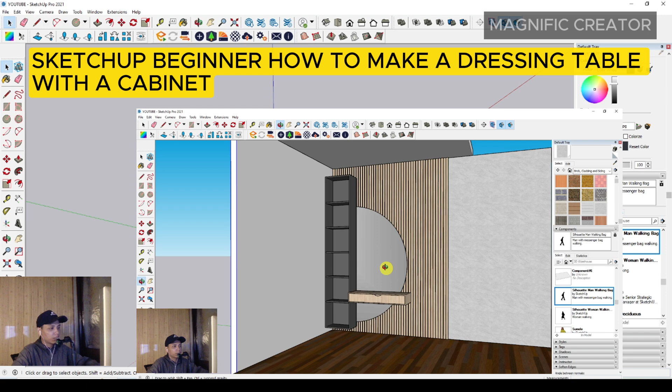Okay, this video I would like to share with all of you about how to make a dressing table with a cabinet. First of all, you have to make the floor and the wall existing. You can use a rectangle and then push it up with any size you want. Then you have to make it a group.

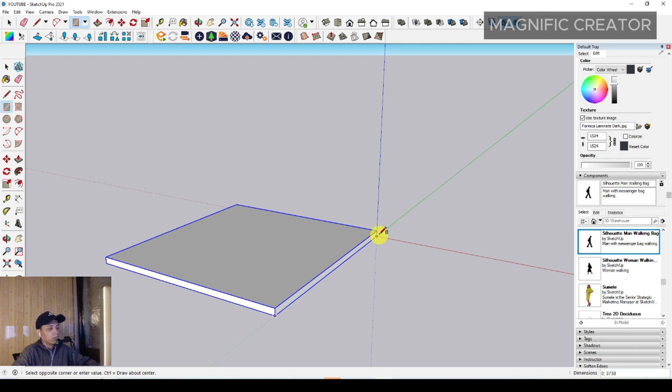After that you can use a rectangle to make a wall like this, and then push it to the back, and push it up until 3000 millimeters, for example. Then you have to make it a group.

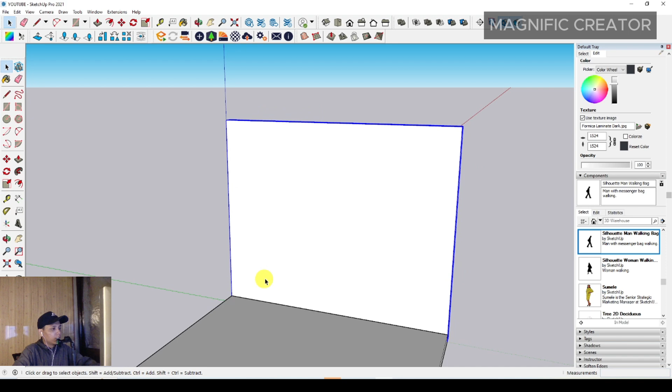After that you can make the elevation of the dressing table with the tape measure tool, and then set the value to around 750 millimeters. After that you can set the height of the cabinet around, maybe 500 millimeters.

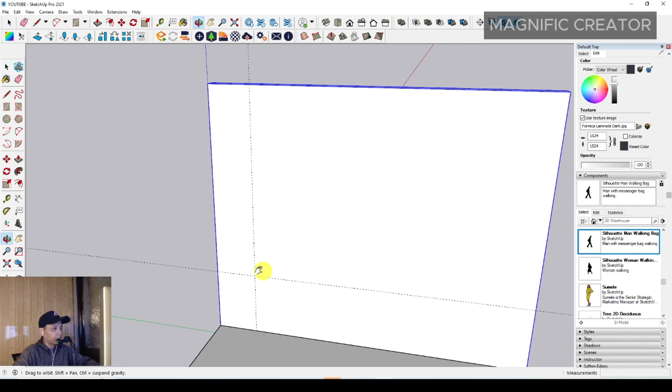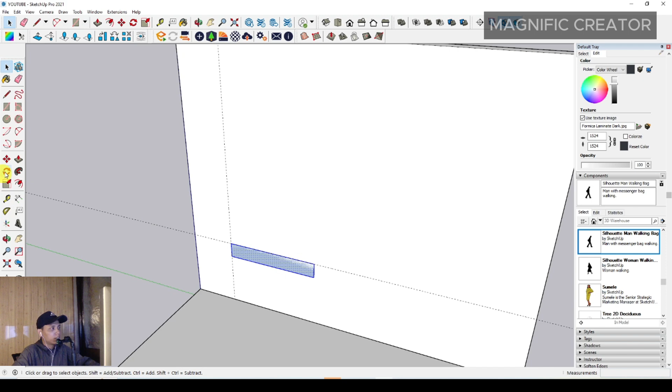After that you can draw the basic shape of the wardrobe, basic shape of the drawer, anyway, the table and the drawer. You can see the dimension around 1160 millimeters for the width, and then push it to the front around 600 millimeters.

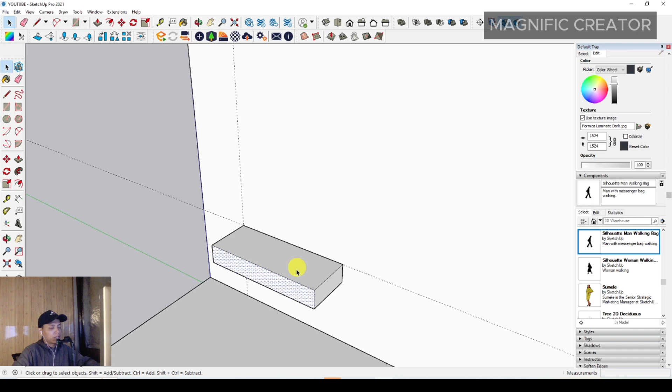Sorry, it's maybe too long, you can make it smaller. You can push it to the back around 200 millimeters plus. Okay, then you can offset it.

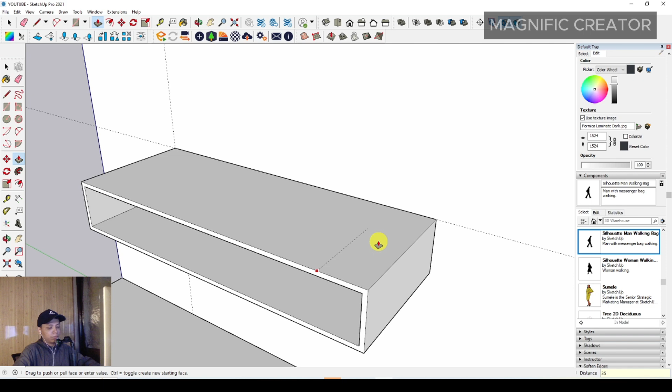With the thickness, you can set the thickness around 15, maybe around 13 millimeters, and then push it to the back around 35 millimeters only. Then you can make it a group, and you can just make a rectangle.

Then you can push it to the front, or you can set the value around 350 millimeters.

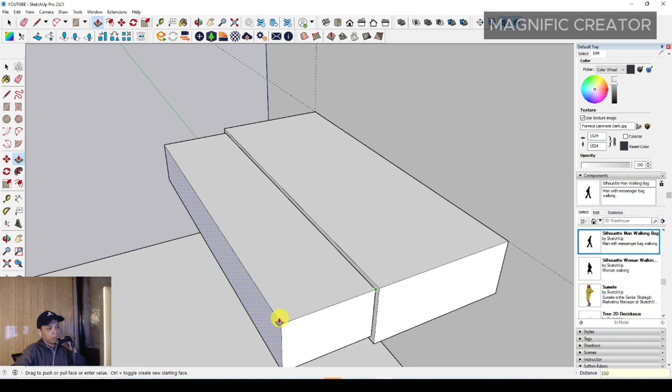After that you have to offset it inside for the drawer, for making a drawer. Then you have to push it down, around 100 millimeters.

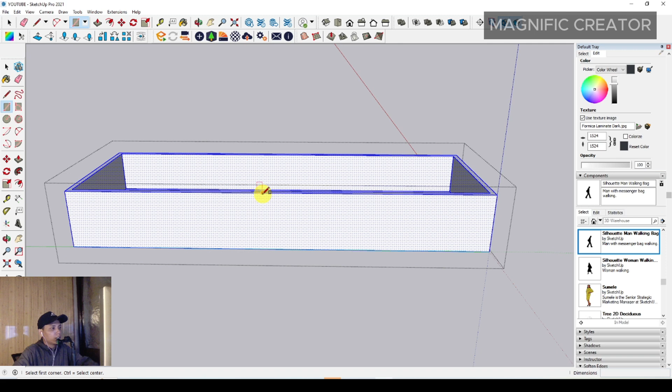Then you can make a drawer handle. You can use a 2-point arc to make it more artistic, and then set the width of the drawer handle, and move it to the back.

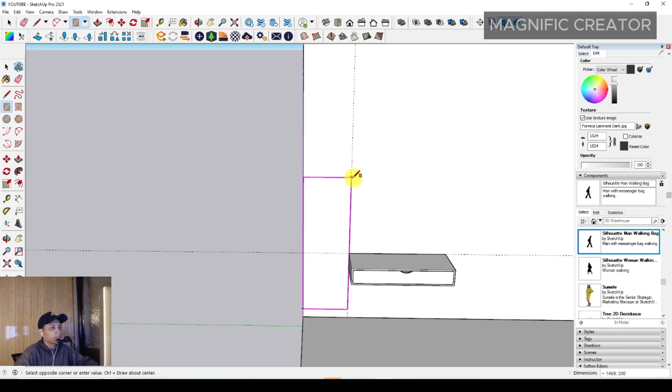Okay, and then you can make a rectangle to make a cabinet. You can make a hanging cabinet around this height, and then push it to the front to make a backsplash of this cabinet, and then just make it a group.

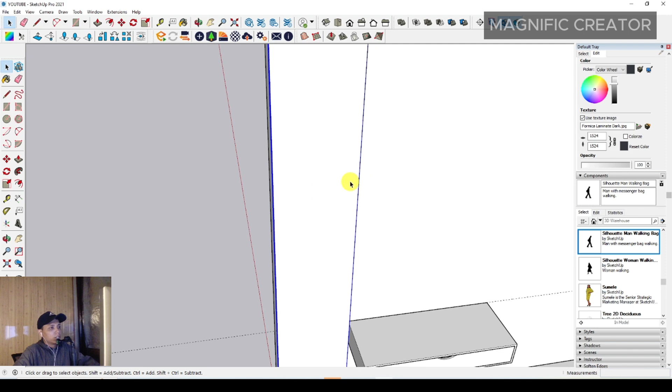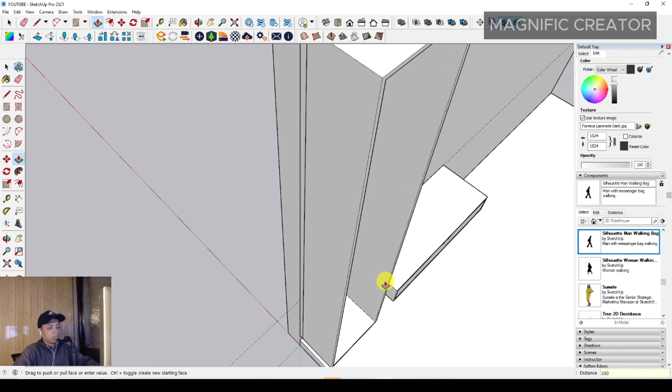And then you have to make a rectangle to make a shelf, to make the border of the shelf itself, and then offset it inside, maybe around 18 millimeters, and just erase it. Then push it to the front, maybe 300 millimeters, and make it a group.

And then you can select a rectangle, and make a horizontal shelf, and then just push it to the upper position, then make it a group and make it a component.

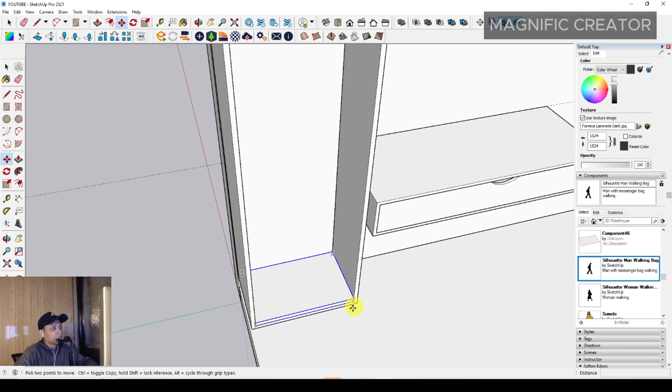And then you can move and press Ctrl, and position it, and then type 6/ and press enter, so you can get the automatic arrangement of this horizontal shelf.

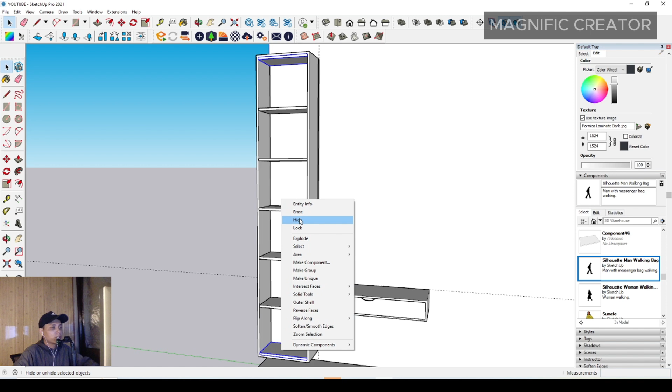And then you can just erase some unnecessary objects right here. After that you can make a 2-point arc to make a half mirror of the dressing table.

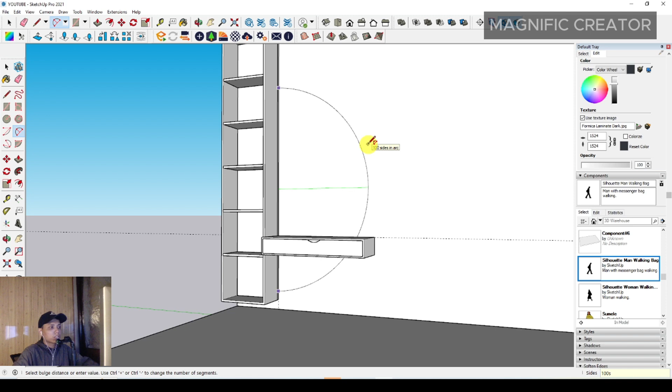You can make a half round mirror. You can type on your keyboard to set the smoothness of this half mirror edge, and then you can select line. Then you can complete the basic shape of the mirror.

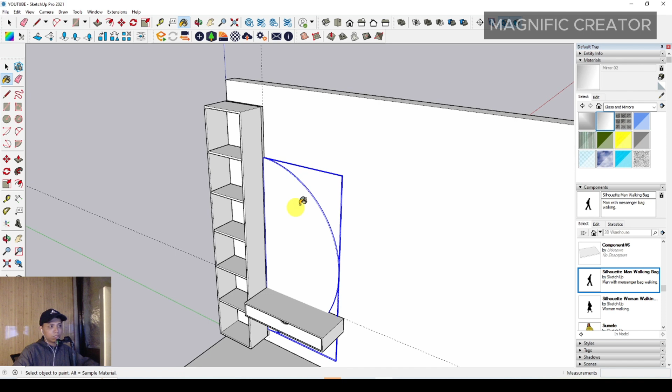On the dressing table, you can set the mirror thickness around 15 millimeters, and after that you can adjust the mirror material with the glass and mirror option. You can set this mirror anyway, or set it to make it look more clear.

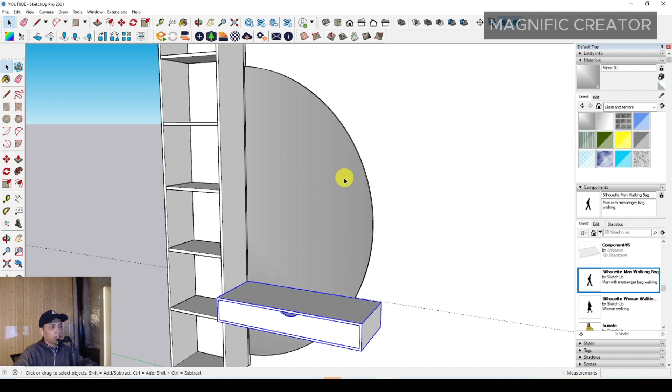You can make the drawer table into one group and just move it to the front a little to give space for the half round mirror on the dressing table. After that, you can delete unnecessary guiding lines like this, and then make a small movement of all the components.

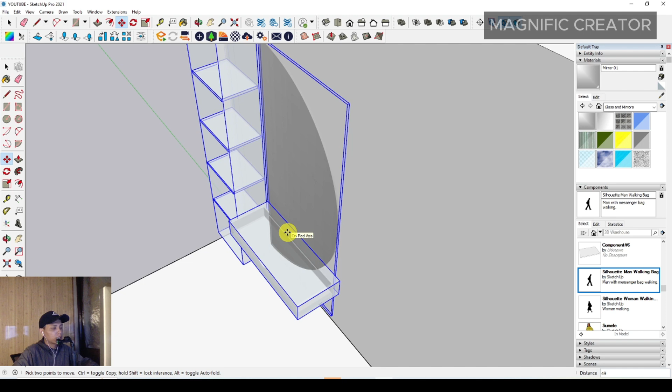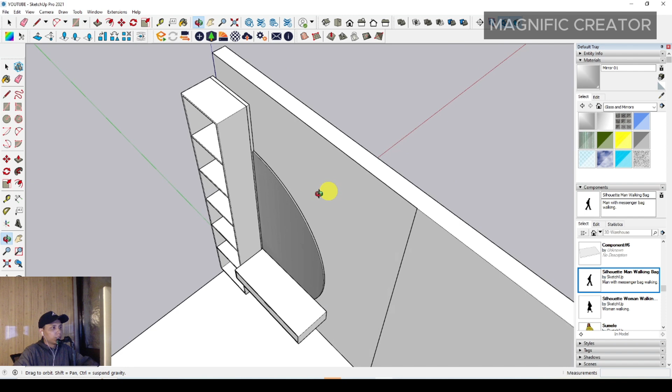You can move it to the front just a little distance, maybe around 30 millimeters, because this small space is used to make a wall panel, something like this. I would like to draw the wall panel to make a more beautiful backdrop for the dressing table. We have to push it to the front around 30 millimeters.

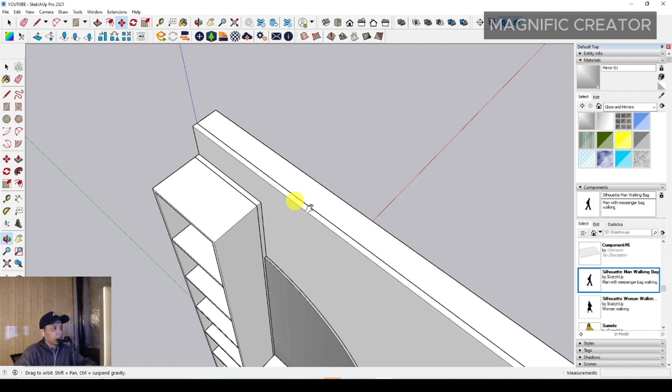After that we can select this single line, then select move, click with the left click and press Control. You can aim to the end point or this position, then type around maybe 50, and just press enter.

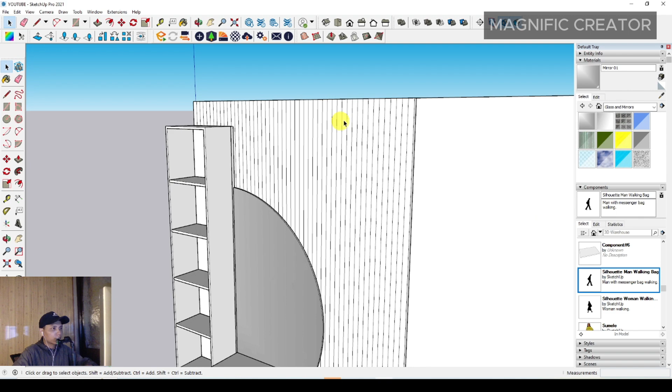Okay, you would find this arrangement, but now we have to adjust it to make it more highlighted surface.

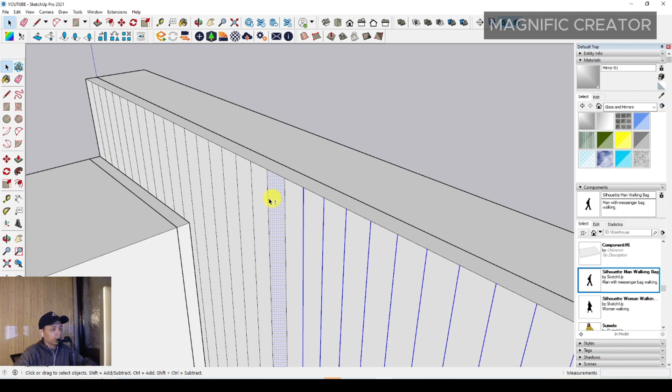We have to make it a more rustic surface by selecting this line one by one. Just follow this part, be patient, because it would create a realistic and rustic surface.

This wall modification means the wall is not too ordinary. It would have a more rustic look.

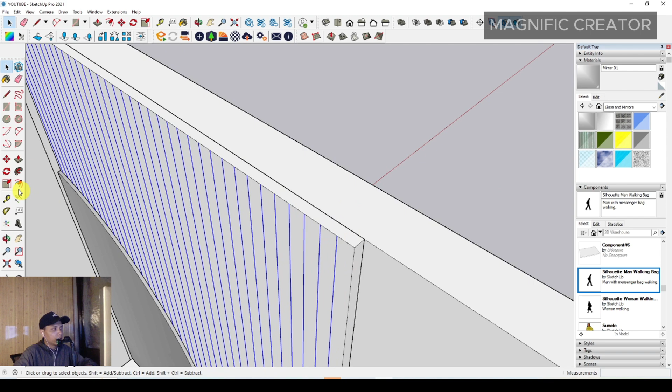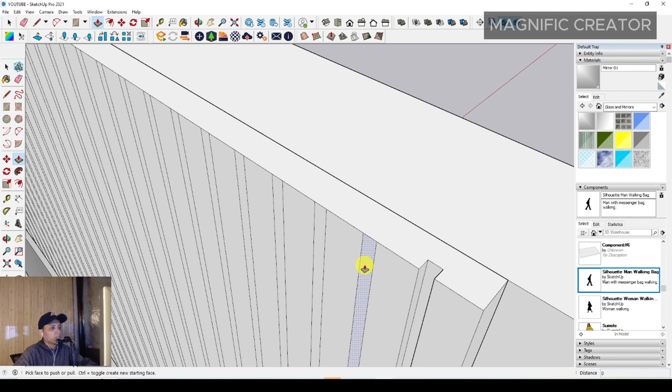You can set the gap between each panel around 11 millimeters, then push it to the back just a little bit, maybe around 10 millimeters, and repeat the push for all the gaps using just double click, so it will be automatically set.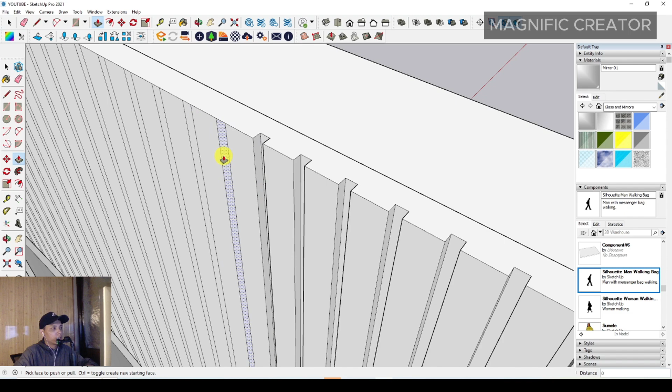The push will use the same value as the previous push. So you have to be patient to make it look perfect.

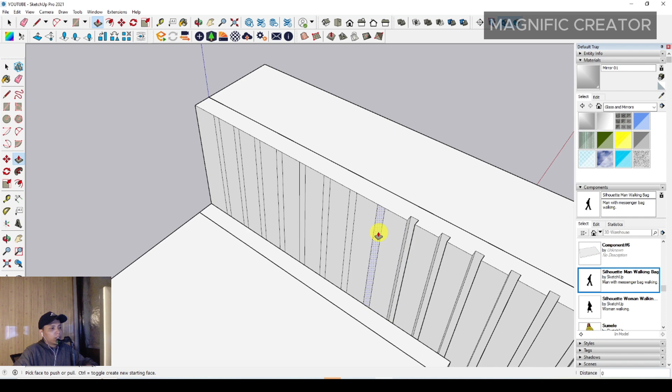Just follow this video, follow this step to make it look rustic for the wall backdrop, something like this, and then you can see the different look.

Then you can make it a group, and you can make it a Formica surface with this material, so you can cut it.

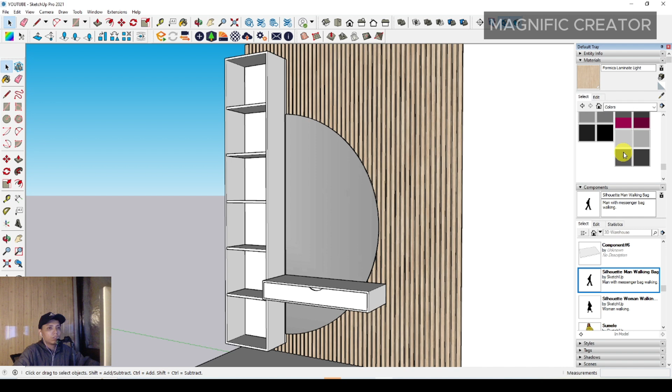After that, you can make another color to assign the color of the cabinet. You can use this color to make the cabinet.

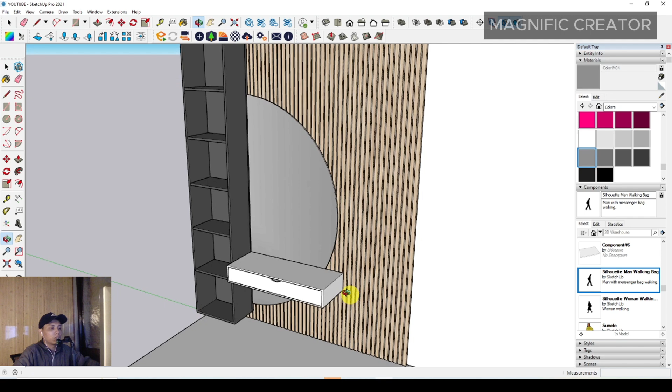It will look more sharp and more highlighted for every component, and you can also set the color of the drawer and the table.

If you didn't like the color, you can adjust it from this material option. You can adjust it more, maybe use...

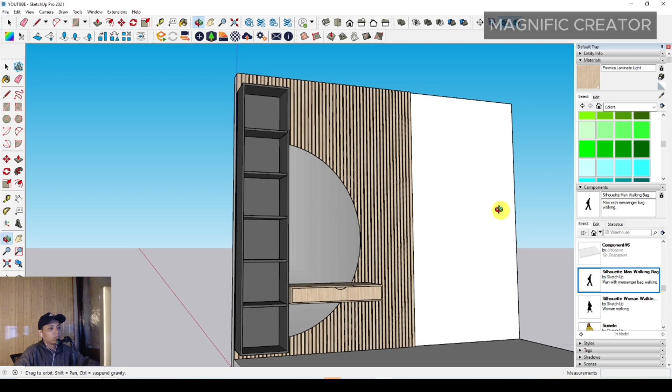Formica surface again, something like this, so it would look more highlighted material, but it still has unity with all of our components.

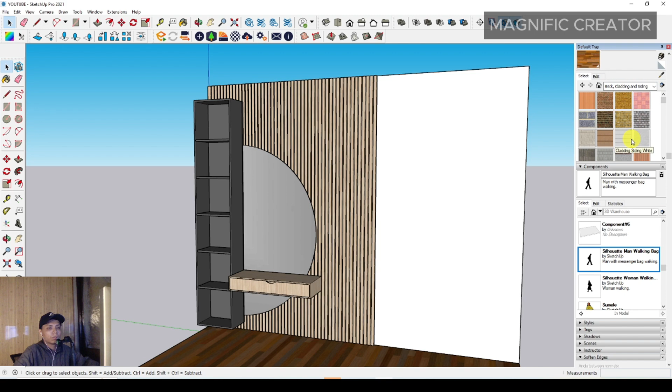Then you can choose this material, and for the wall you can set this material to make it better. Then you can make a ceiling with a rectangle, and set the width of the rectangle.

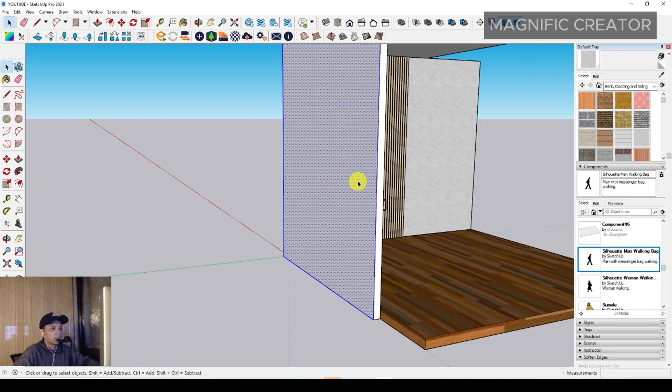Just make it a group. Okay, I think that's enough, so you can explore more for this object, and I hope it will be an advantage and benefit to all of you. Wait for my next video. Thank you.